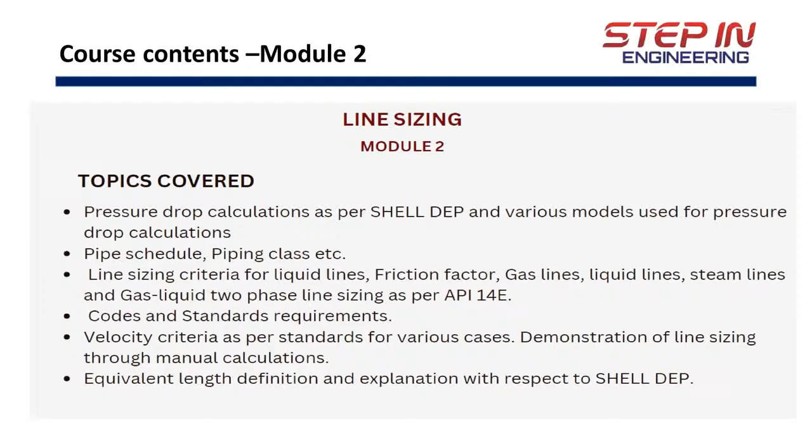So the next module: module number 3 is purely with respect to pump suction sizing and pump discharge sizing. This is where the NPSH, net positive suction head, comes in, which is very, very important. So this is course 3, module 3.

Module number 4 is standard. Modules 4 and 5 are Pipenet. In Pipenet there are 3 modules: one is standard, the other is transient, and the third is the fire water system. All 3 we are going to do as live demonstrations, which will be repeated. We have also given the screenshots, so once you have the opportunity to access the software, you can go through the screenshots and perform it yourself.

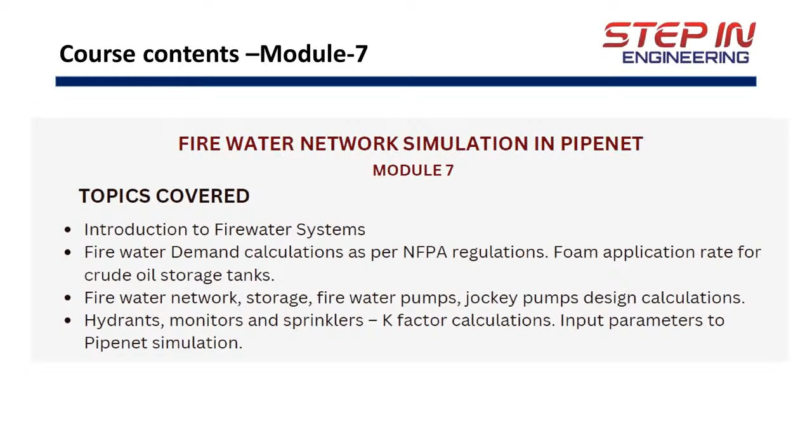Module 5 is a transient module. The transient module is for surge analysis. Surge analysis is very important when the pump starts or shuts down, or when the ESD valve trips. What happens? What is the maximum pressure the pipeline will be subjected to? All these things are in module 5. Module 6, as I said, is fire water network analysis, and module 7 is the network with respect to Pipenet for the fire water system.

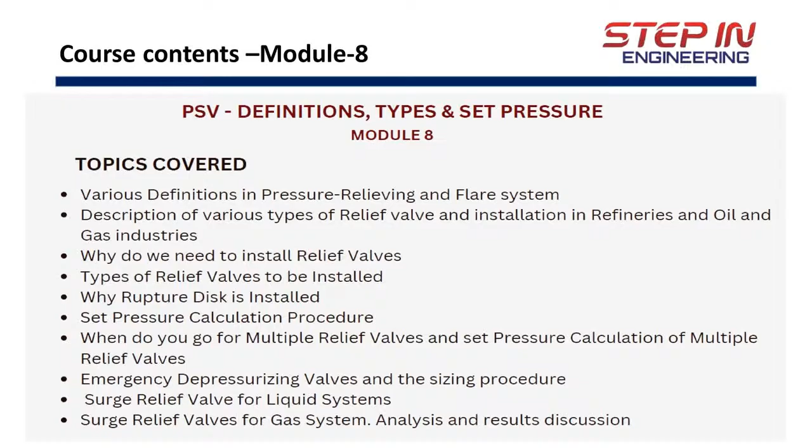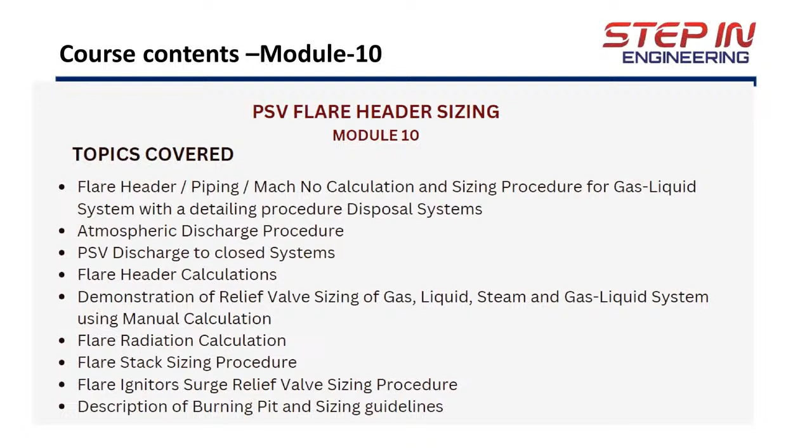Modules 8, 9, 10, 3 modules, we have done for relief valve calculations, flare header sizing and back pressure calculations. When you go to an interview, they will ask what type of relief valve, what is the back pressure, how do you calculate the back pressure, how do you estimate the sizing, how do you estimate the Mach number. So in course modules 8, 9, 10 we have included what is really required for design engineers to perform relief valve calculation, flare header, burning pit and back pressure, the important relief system.

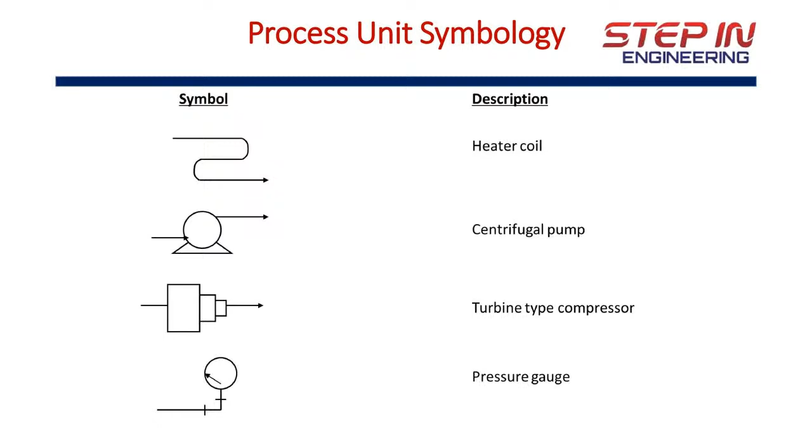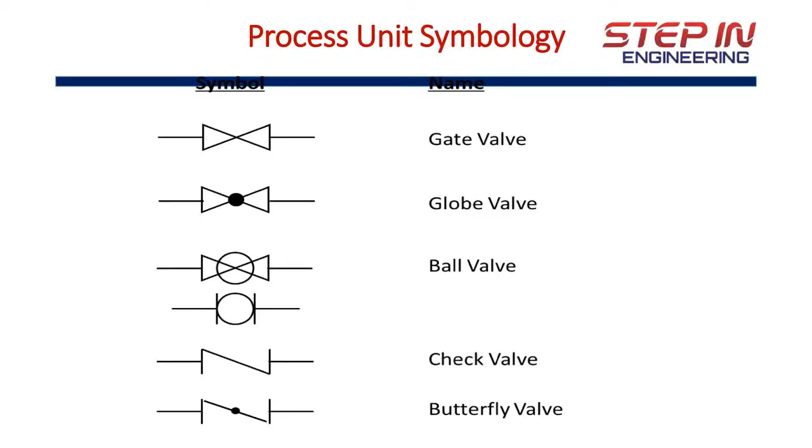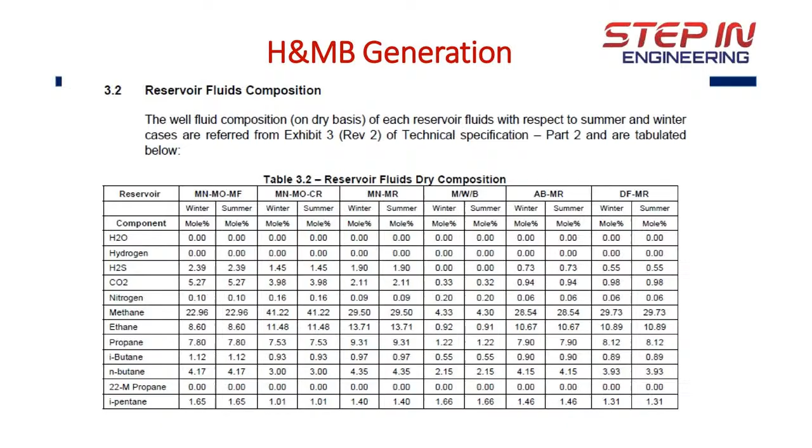Now, just to have a glance, I'll browse through the course materials covering all 10 modules. This is about the legend symbols, and the legend symbols continue. These are just a few examples to show you how the course material looks. This is the heat and material balance, how it is generated from the simulation software, and why the HMB is very important. How the output HMB from HYSYS simulation looks, what thermodynamic properties you get from HYSYS, all shown as screenshots, and the most important information you'll get.

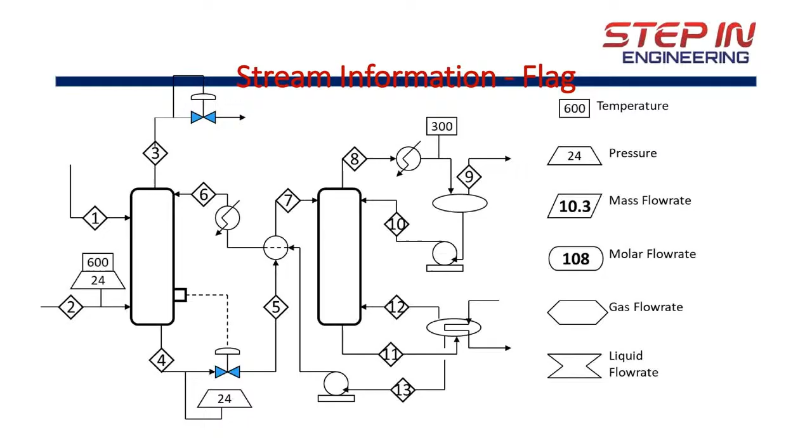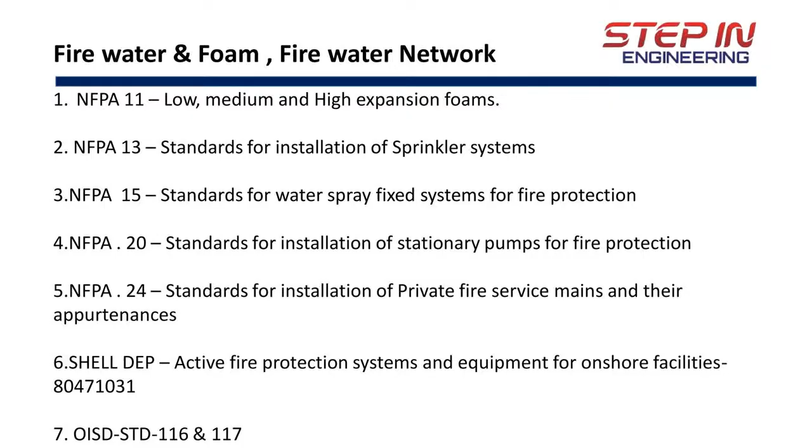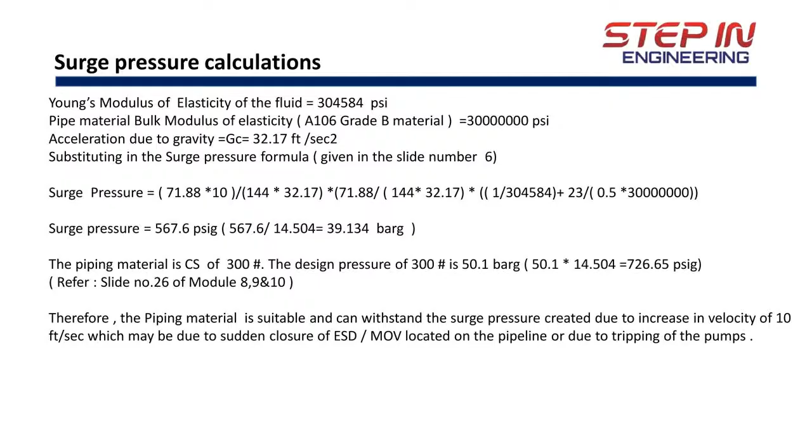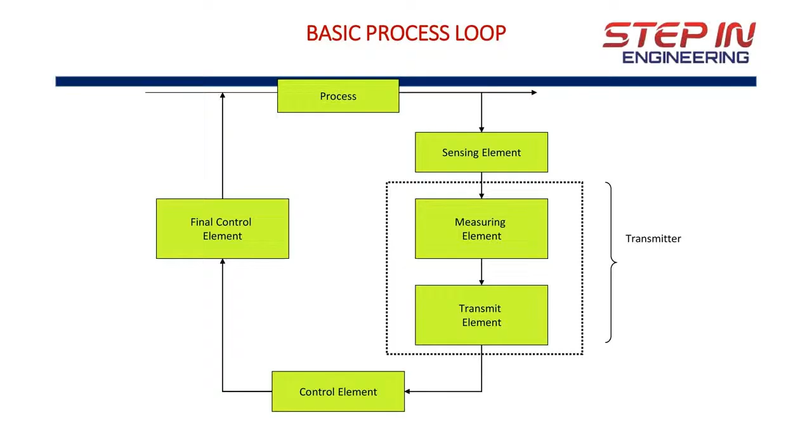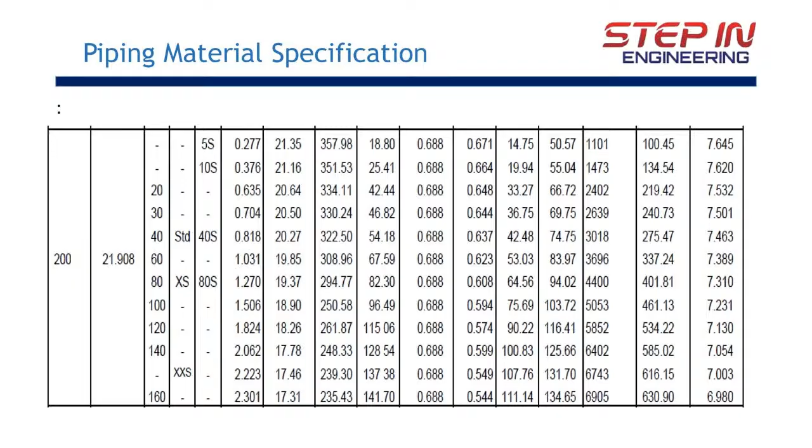Even the P&ID process loops: feed forward control, feedback control, split range controller, cascade controller, all these are part of the P&ID. This is also part of the piping material specification. That is one of the most important subjects; although it belongs to the mechanical piping department, a process design engineer should know it.

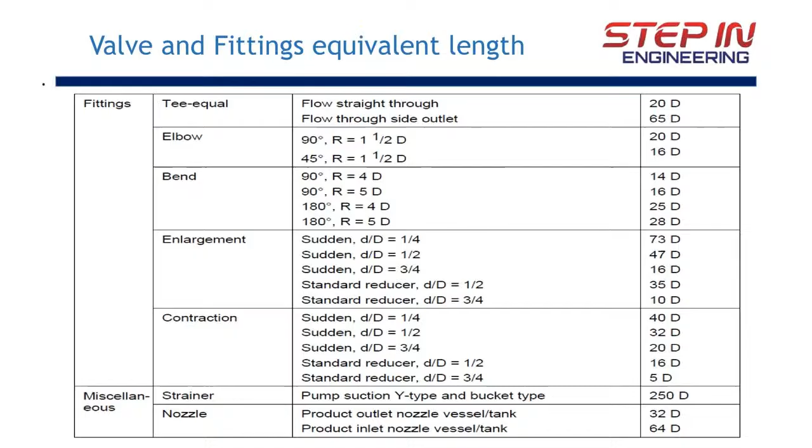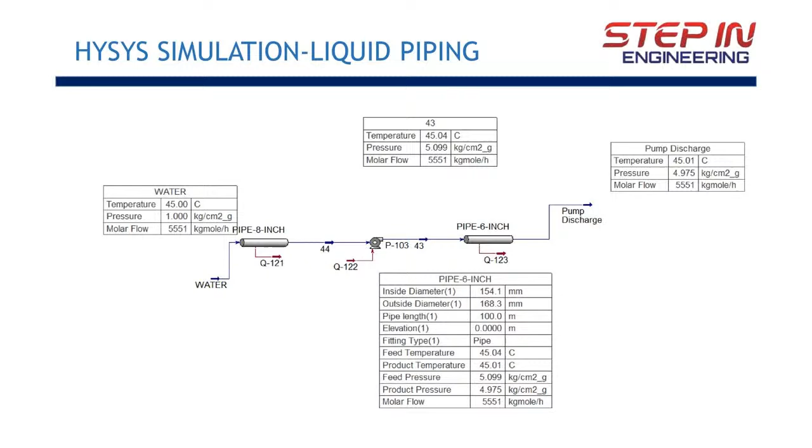When you are doing the hydraulic calculation as well, you should know what the equivalent length is and how to calculate it, and as per 14E all the manual calculations are shown. This is actually the HYSYS output. So you can do the manual calculation, but always cross check with HYSYS also. This also demonstrates how to use 14E for friction factor and gas HYSYS calculation.

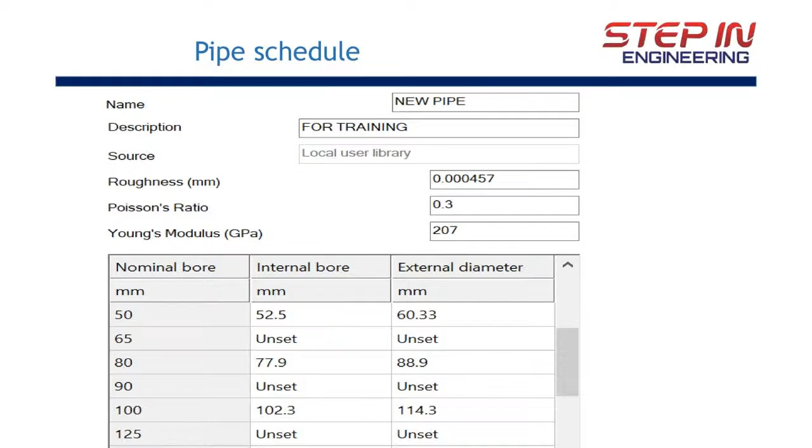Now coming to PipeNet. In PipeNet, I have given the screenshots. So with these screenshots, although you don't have PipeNet on your system, when you get an opportunity, using these screenshots you should be able to perform it yourself. This is with respect to the standard model, and this is actually for the transient model.

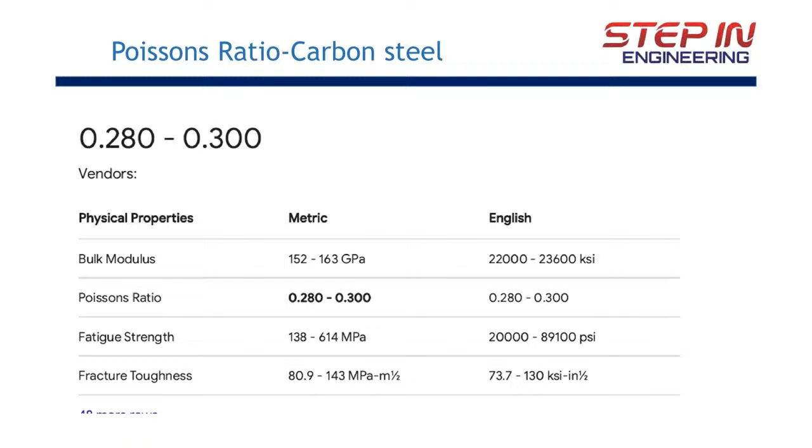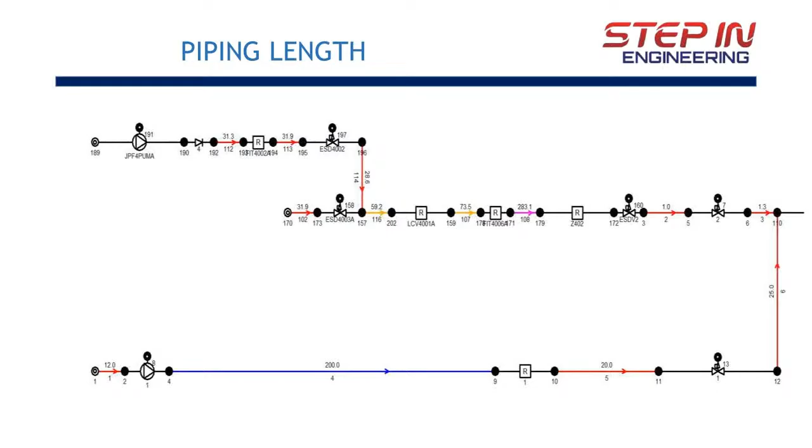This is how the transient model looks when a long pipeline gets subjected to closure of an ESD MOV, and what impact that has on the design pressure of the piping. All these things are discussed in the transient model analysis.

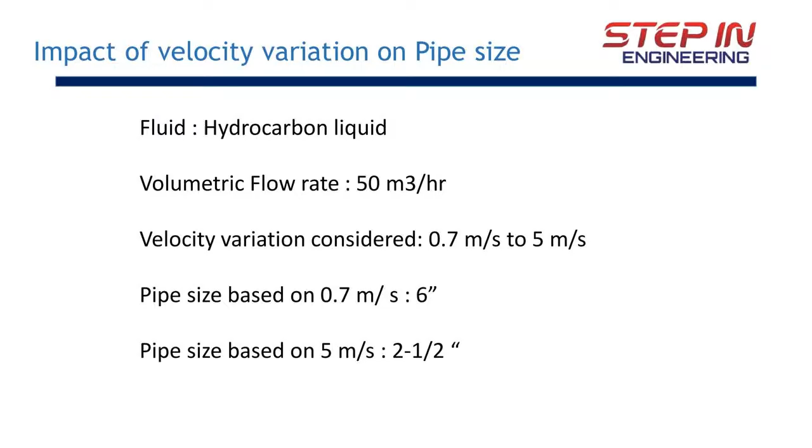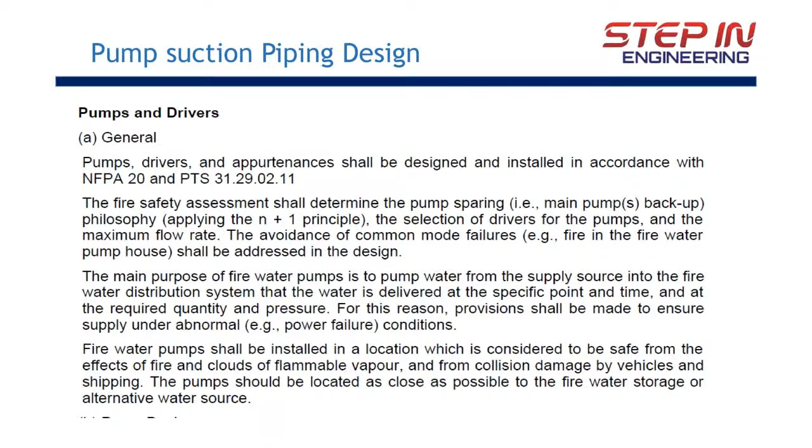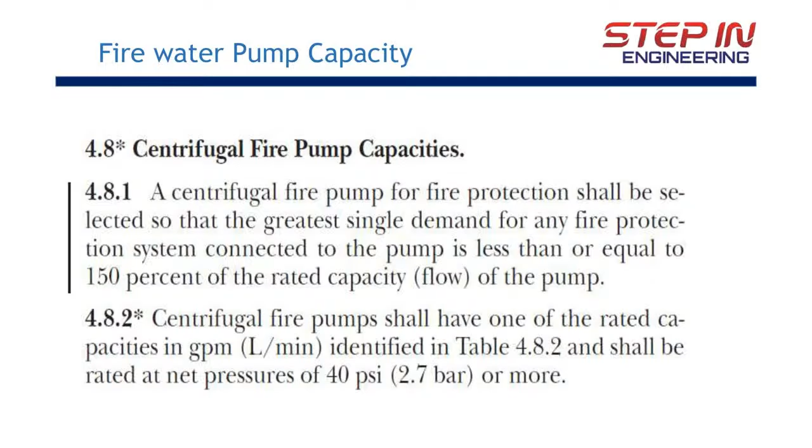Then most important is what is shown for the fire water sprinkler system, hydrant, and deluge valve. All these details are covered in module number 7. These are some of the course materials just to have a glance. How the fire water system looks, what the storage is, how the pump sizing is done, what velocity to keep in the network, and finally how you choose your fire water pumps and jockey pump capacity. Then how you estimate the demand calculation and application rate.

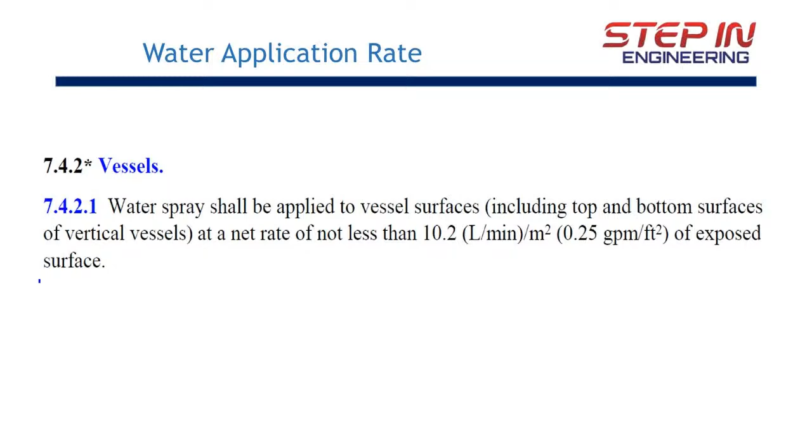These are what is really required for a process safety engineer or loss prevention engineer when they start working on the fire water network. Then coming to the foam system, how do you design the foam system? How do you estimate the foam requirement for a crude oil storage tank?

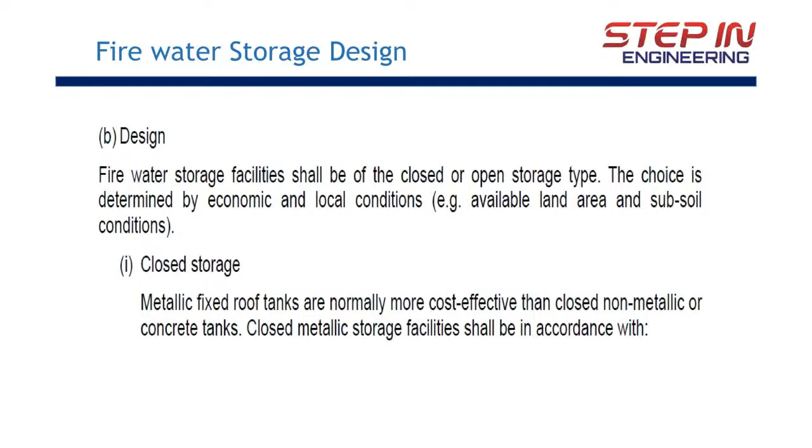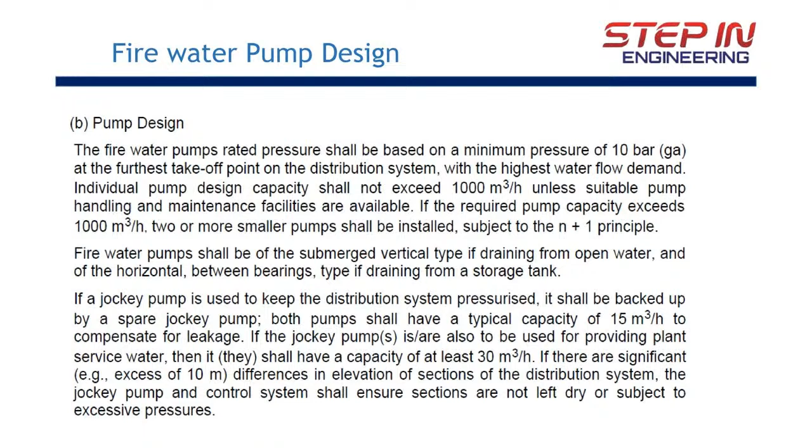Because I work in process design engineering, I know what is required for you. That's why I prepared all this course material and content based on my experience. I gathered all the information available here and there, compiled it, brought it together and presented it in the course material.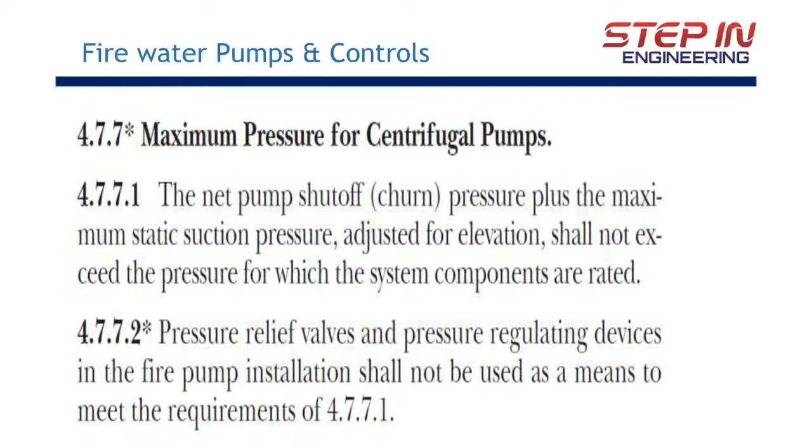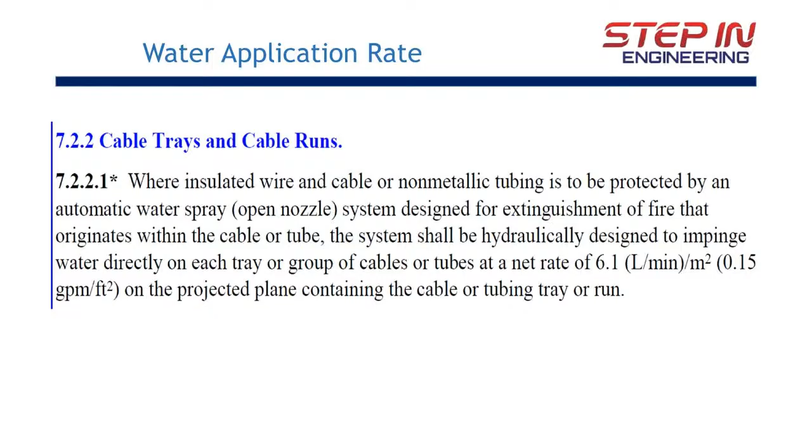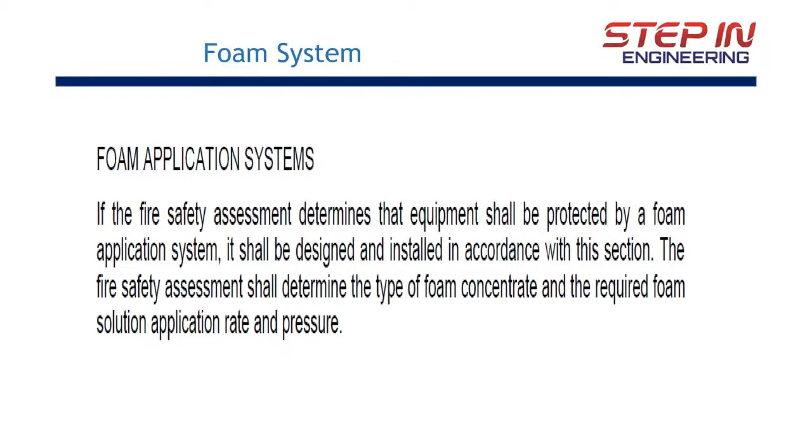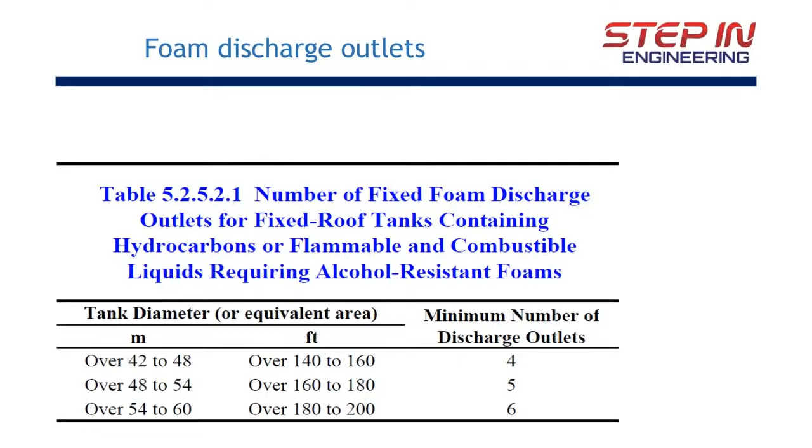It's a great pleasure for me to share all this information with you as a designer. This course material may not be useful right now, but when you really start working and practicing, it will be really useful. In total, for 10 modules, we have close to 800 slides, an average of about 70 to 80 slides for each module.

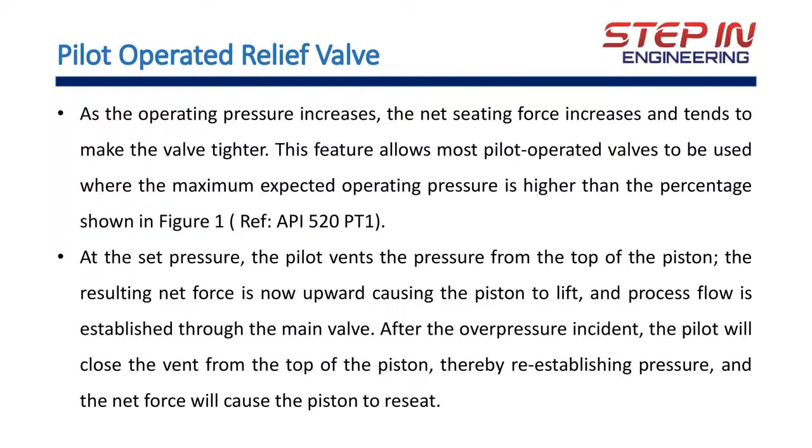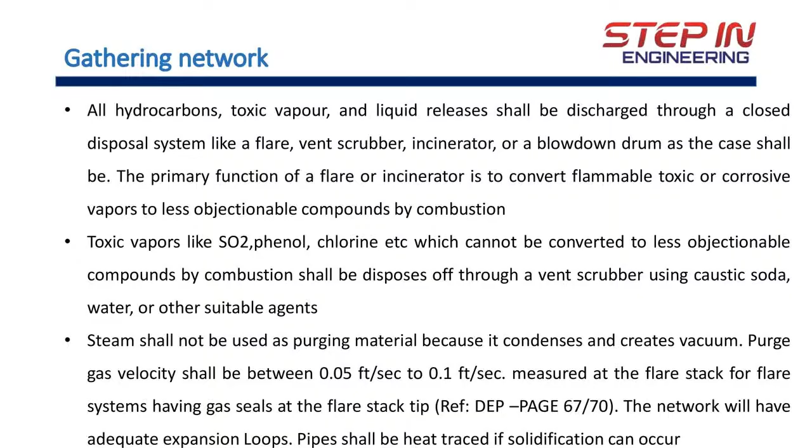Now it's another 2-3 minutes and the webinar will be closed, but I'm still continuing. This is the flare calculation.